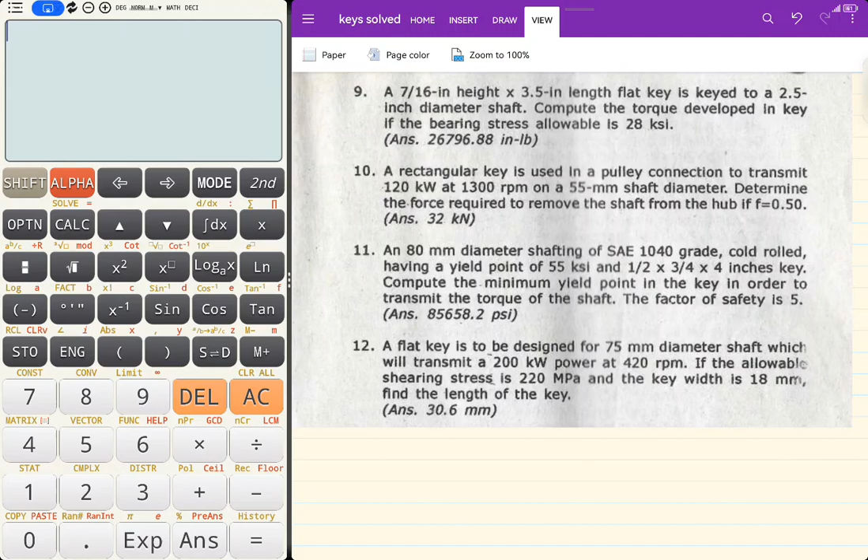So, let's have the last part of your keys bago tayo magpunta ng coupling. Okay? So, let us read the following problems. I have here problems 9 to 12. Okay? So, let's start with number 9.

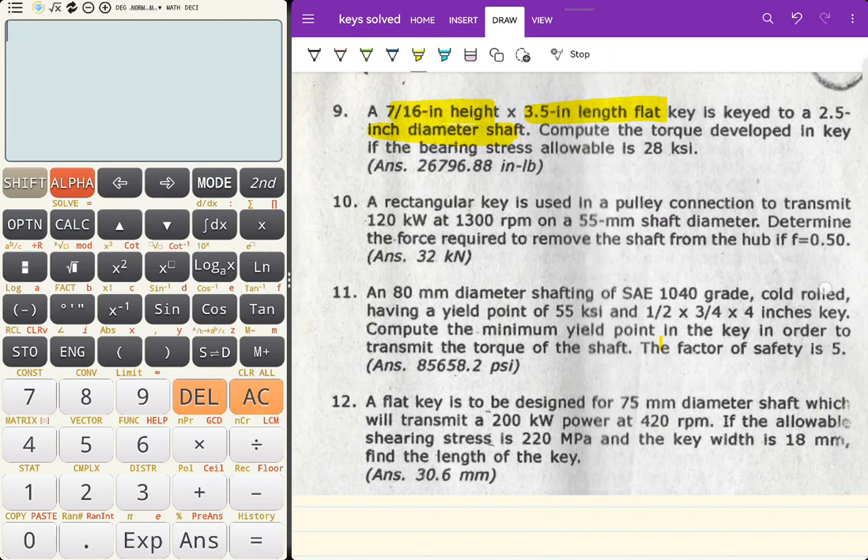A 7/16" height, so binigyan ka agad dyan ng height, by 3.5" length, flat key, is keyed to a 2.5" diameter shaft. Okay? Compute the torque developed in the key if the bearing stress allowable is 28 KSI. Alam naman natin from the past discussions that kapag hindi mo kayang kabisaduhin yung formula, you need to draw. But in order for us not to take longer, ito na yung formula niya.

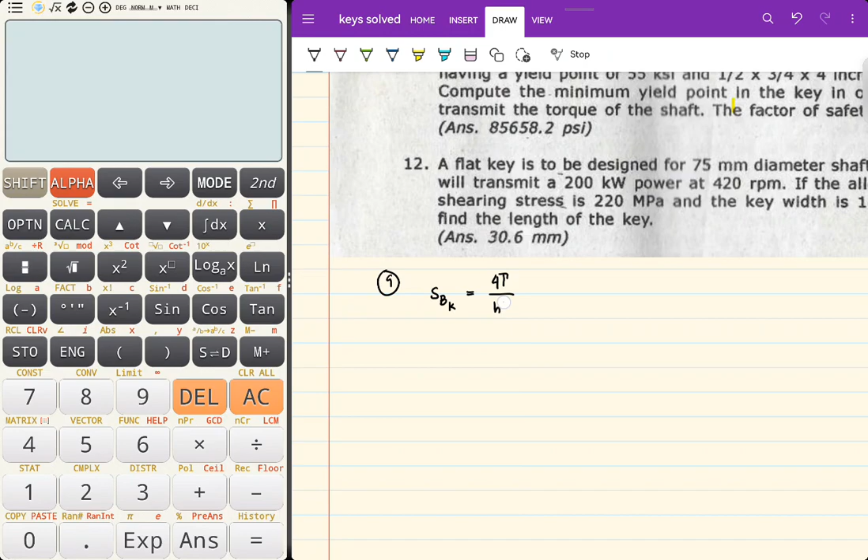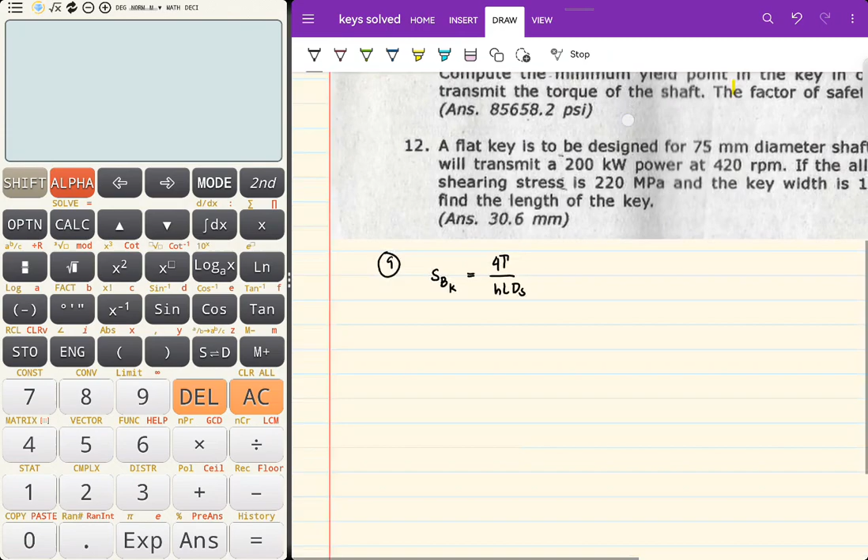Okay, the bearing stress on the key is equal to 4T/HLDs. Given kagad yung H, given kagad yung L, given kagad itong stress, and then the diameter of the shaft. All you need to do is to reform this equation. So this will become torque equal to SBK·H·L·Ds divided by 4. Very basic yung mga solving natin dito.

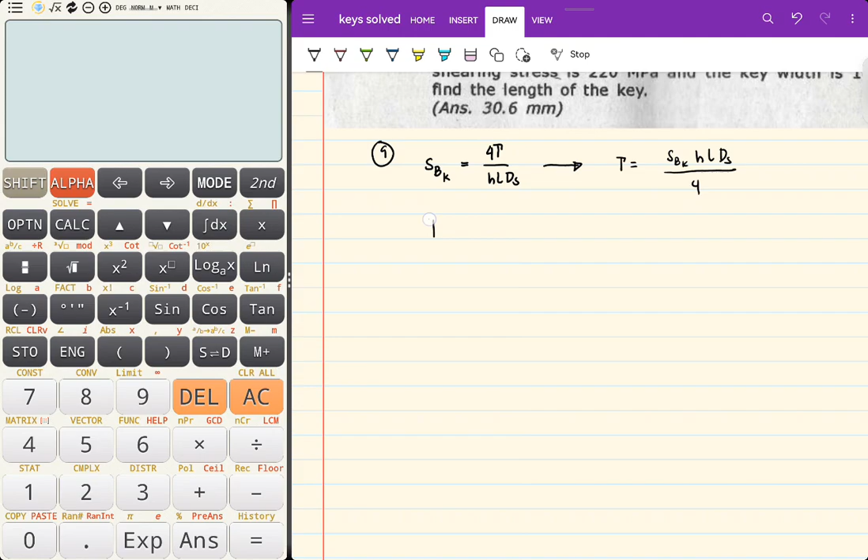It won't take long. So, your SBK is 28 KSI. So, that is equal to 28,000 pound per inch squared. Okay? Iba yung KSI sa kips, ha? 1 kip equal yan sa 1,000 pounds. Kasi ang kip, kilo-pounds. Remember that. And then H is 7/16". Yung L is 3.5". The diameter of the shaft is 2.5".

Divide by 4. Ang lalabas dapat dyan, since it is torque, pound-inch. Cancel the same units. So, 28,000 multiply to 7 divided by 16 by 3.5 times 2.5 divided by 4. So the answer is 26,796.875 pound-inch. Basic yung mga ganitong problems. Check.

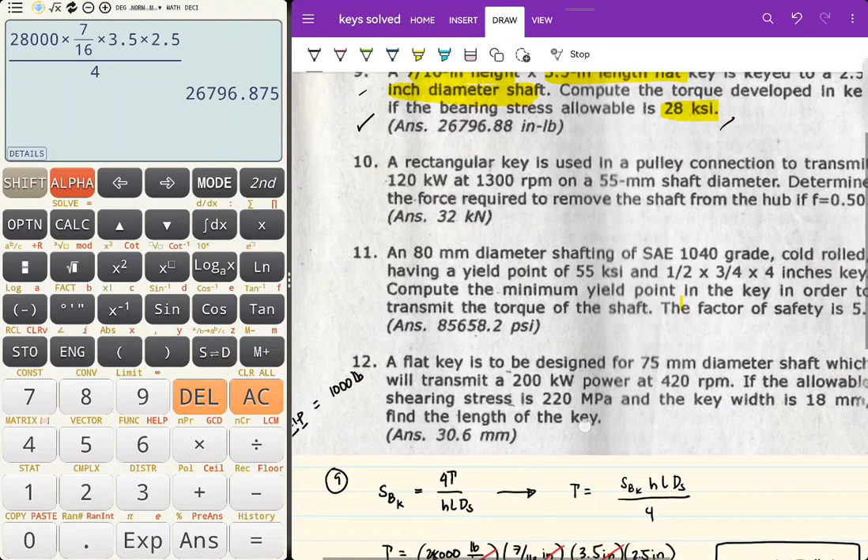Number 10. So, a rectangular key is used. Ito yung keyword. Rectangular key is used in a pulley connection to transmit 120 kilowatts of power at 1,300 RPM on a 55 mm shaft diameter. Determine the force required to remove the shaft from the hub if f is equal to 0.50. Meron kang friction. Yan yung kumukontra dun sa force to remove the shaft from the hub. Tingnan natin. So, may mga binigay sa akin dito.

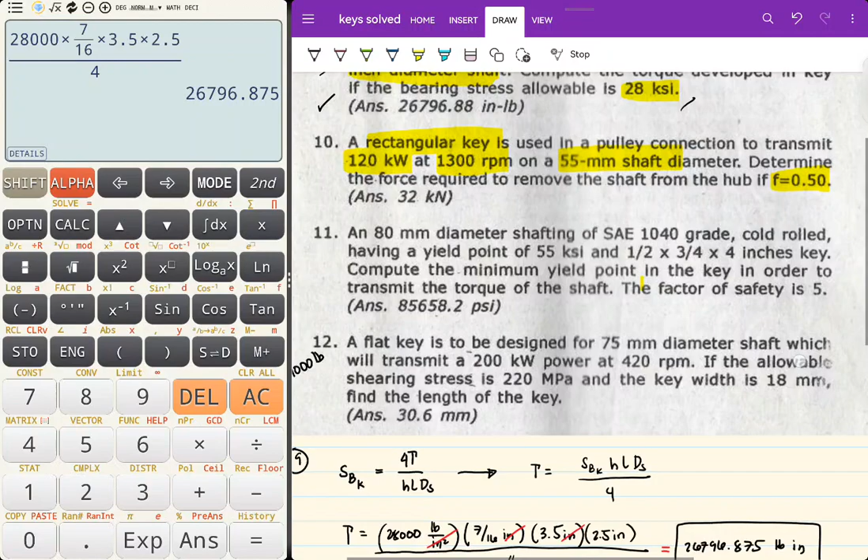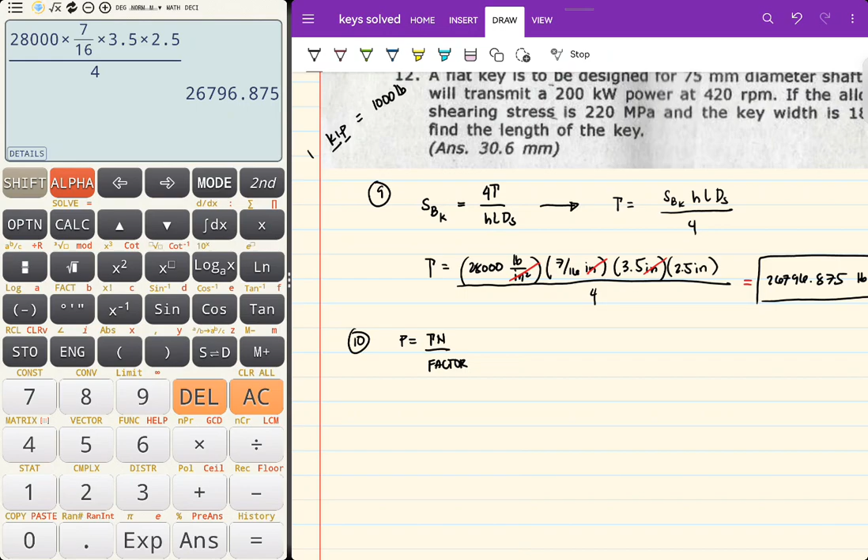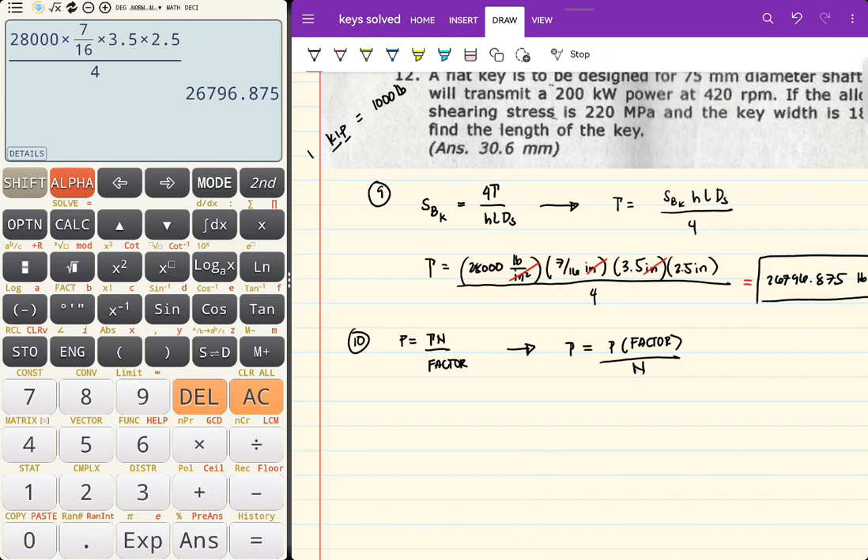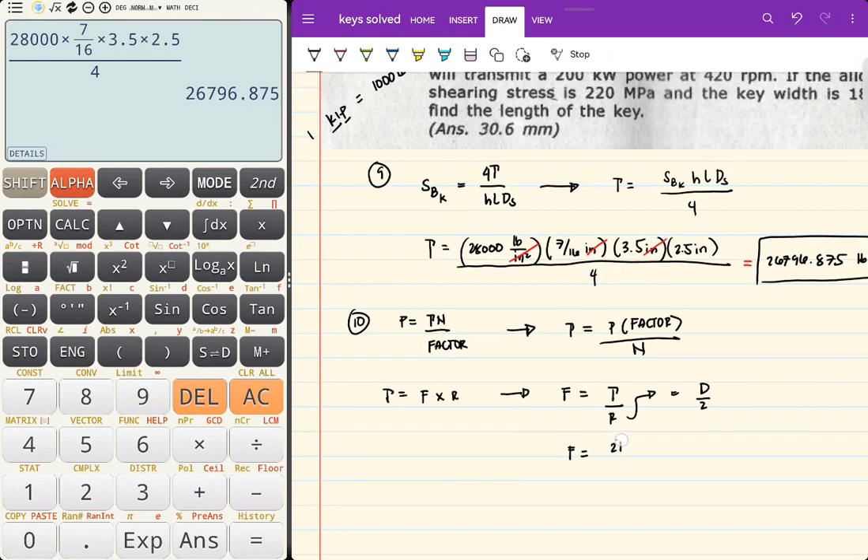So, number 10. Ang hahanapin natin is the torque muna. So, power is equal to T·N divided by factor. So, in terms of the torque, that is power times factor divided by N. So, torque is equal to force times radius. Ang kailangan ko is force. Reform natin. Force is equal to T divided by R. Yung R kasi is simply equal to D divided by 2. So, F is equal to 2T divided by diameter of the shaft.

So, palitan natin yung torque. Force is equal to 2 times the torque, that is power times factor, divided by N times diameter of the shaft. So, force is equal to twice of the power, 120 kilowatts, times the factor, 9549123 Newton-millimeter RPM every kilowatt, divided by N, 1,300 RPM, times 55 mm diameter of the shaft.

Cancel same units. Millimeter, kilowatt, RPM. Ang matitira is Newton. Kailangan natin kilonewton. So, multiply natin ng 1 kilonewton every 1,000 newtons. Ang natira ngayon kilonewton. So, the force is equal to 2 times 120 times 9549123 divided by 55 times 1,300 times 1,000. Basic oh. So, the force is equal to 32.0525.

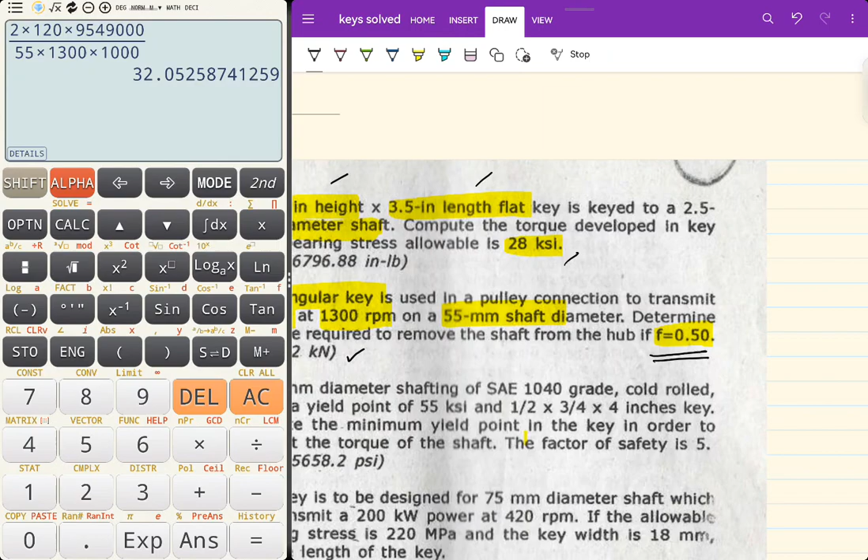So, ano ang malalaman natin dyan? That you don't have to doubt kapag may nakita kang unfamiliar. Yung unfamiliar point dito is itong friction coefficient. Since hindi naman siya gagamitin dun sa ating formula, why not try it first? Calculate mo muna. Pag nakita mo dun sa choices na malapit yung answer mo, then that is the answer. Huwag mo problemahin masyado. Ilagay mo muna sa equation, isolve mo. Like this friction, which is very unrelated sa problem. So, let's proceed with number 11.

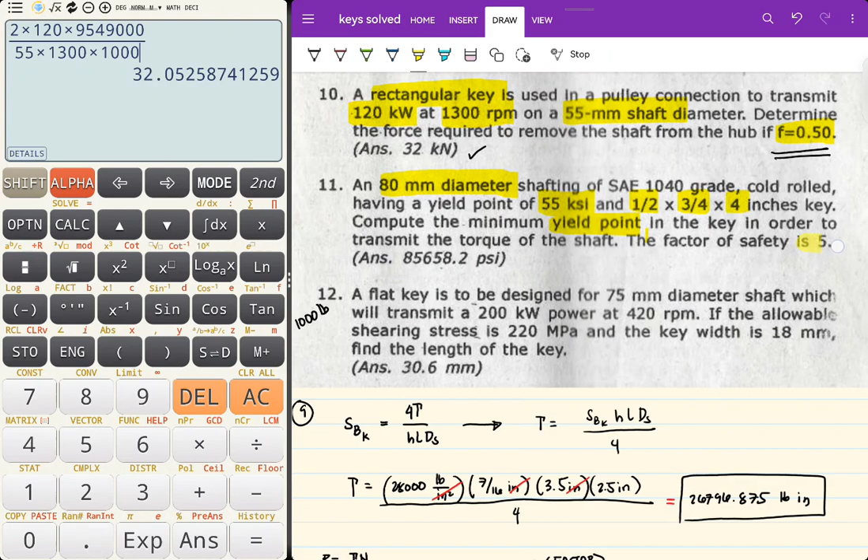An 80 mm diameter shafting of SAE grade 1040, cold rolled, having yield point. Binigyan ka ng yield point. Tapos, size of the key: height, width, and length. Magkabaliktad yan eh. Height, width, and length, ganun dapat yung pagkaka-arrange. Now, compute the minimum yield point in the key in order to transmit the torque in the shaft. Meron din tayong na-solve na ganito. The factor of safety is 5.

So, nagbigay ng yield point sa shaft. Since yung shaft mo is with keyway, dun tayo sa standard ng shafting. Ibig sabihin yung factor of safety of the shaft is the same factor of safety nung key. The only thing na magiging related sila is the torque. Yung torque on the key is equal to the torque on the shaft. Tandaan natin yan. So, the design stress on the shaft is equal to 16T over pi diameter of the shaft cubed. This is equal to 0.6 SY divided by the factor of safety.

I-solve ko siya in terms of the torque. So, the torque of the shaft will become 0.6 SY of the shafting times pi diameter of the shafting cubed divided by 16 factor of safety. I now have the first equation. The other one, nagbigay dito yung yield point of the key. Babase natin siya dun sa shearing stress on the key. That is equal to 0.6 SYK divided by factor of safety. Yung SSK, shearing stress on the key, is equal to 2T, diba?

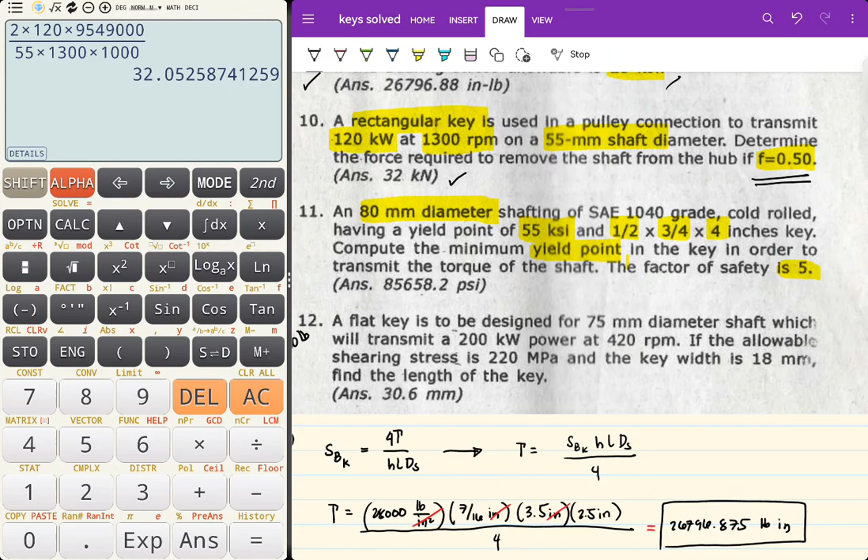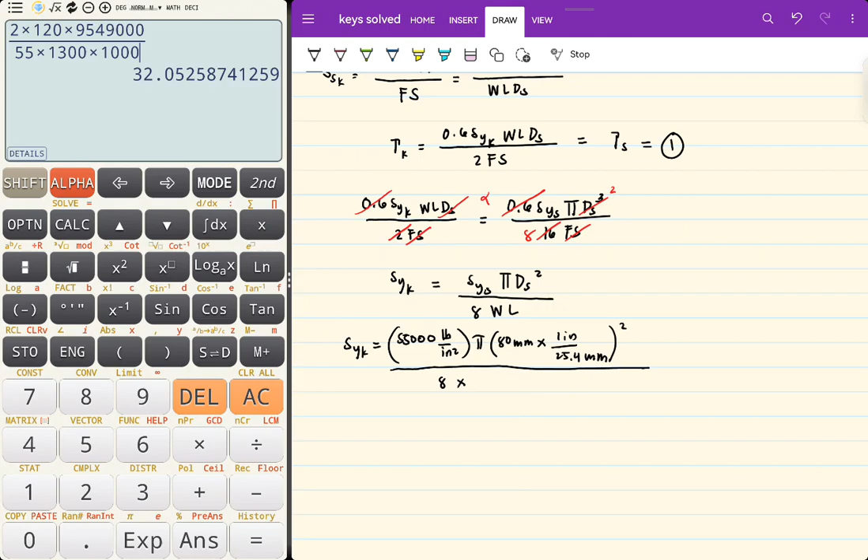So, SYK is equal to, yung SYS natin is, bigay ba dito? 55 KSI. So, 55,000 pound per inch squared. Pi, diameter of the shaft. Diameter of the shaft is 80 mm. So, 80 mm times 1 inch every 25.4 mm. Naka-squared. Divide by 8 times W, W is 0.75. Ito, 3/4 and 4 inch. 0.75 inch times 4 inch. Cancel all same units. Dapat lalabas dyan is PSI, pounds per inch squared. So, inch squared, inch squared.

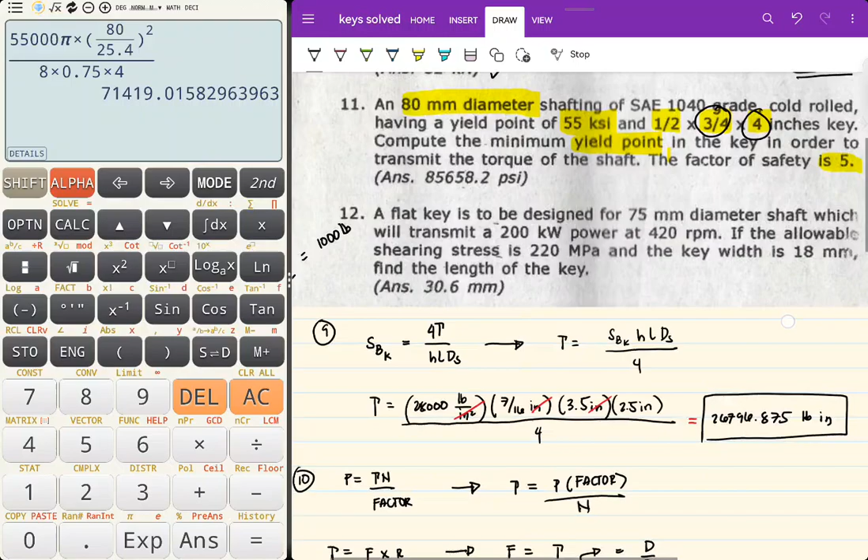So, the answer is 55,000 pi times 80 divided by 25.4, square mo yung value, divide by 8 times 0.75 times 4. So, 7.1. O, bakit kaya kulang? I think, dito, W mo is 1/2. The width is 1/2. Try natin palitan ng 0.5. So, hindi pa rin sakto. Ano kaya naging problema? Factor of safety is 5. O, tama naman.

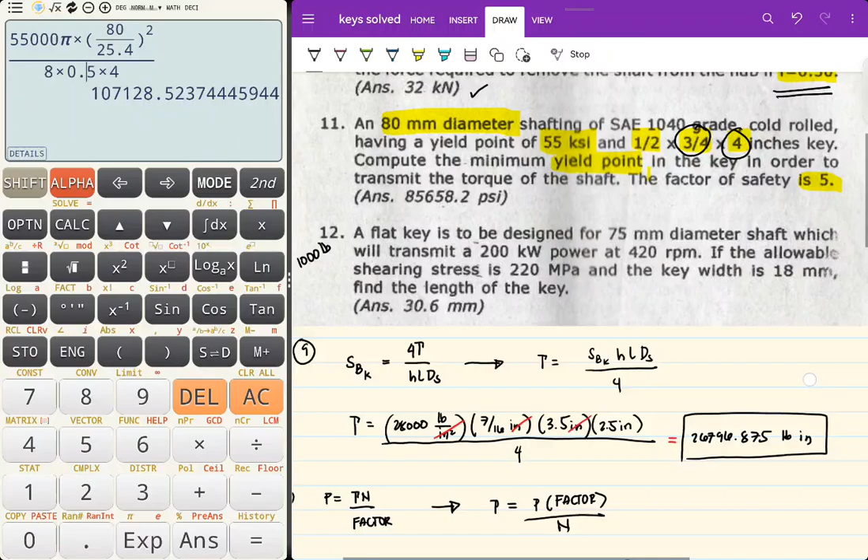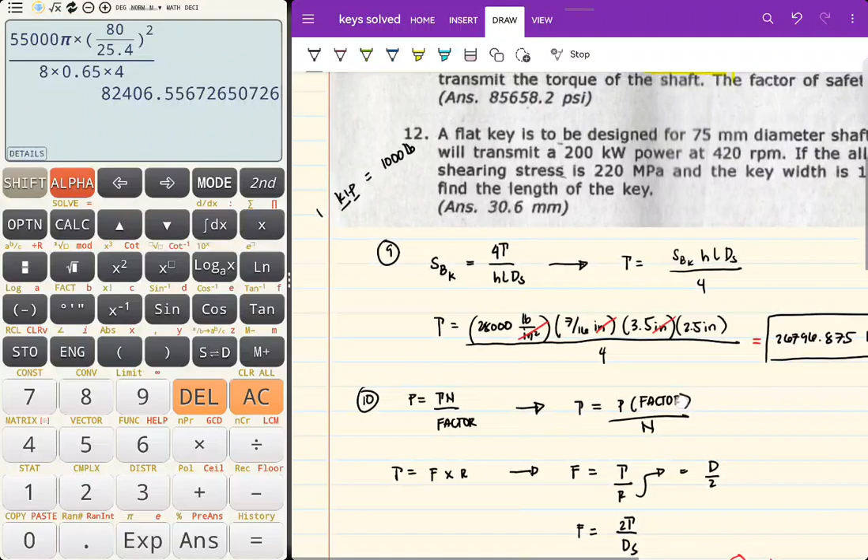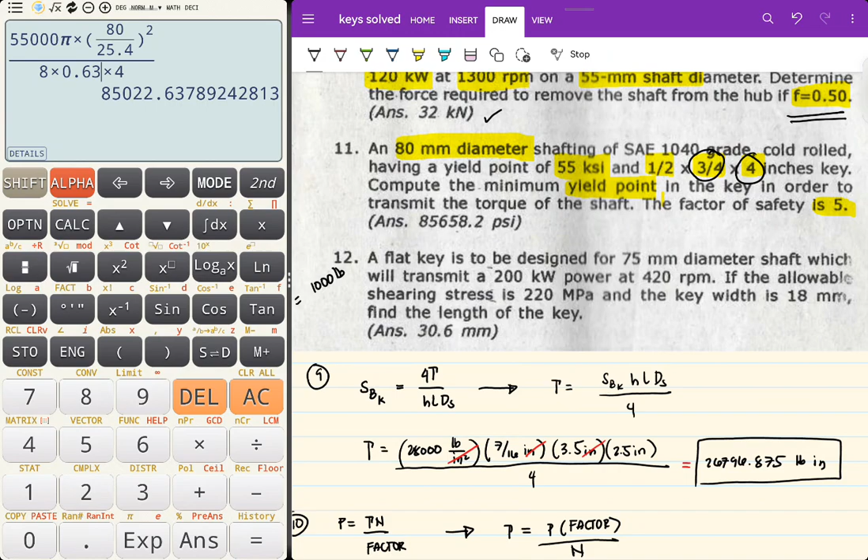The minimum yield point in the key. Meron ba ako nakaligtaan? So, 8 times 0.75. Ayan, 0.63 yata ginamit nyo. I don't know saan nagmula. Somewhere there, yun yung ginamit. I don't know what happened there. So, ang sagot natin dito, 0.75. Kasi tignan nyo na to ha. Kinancel ko dito yung 2. Magiging 8 nga naman yung 16 Fs.

So, in terms of the torque. So, review natin. Tama naman yung process dito. Dito naman, so may 2, tapos may 0.6 Fs. Same lang sila. May sinabi bang same ang material ng key sa shaft? Wala. Sa shaft, itong factor of safety na 5. So, kung ganun ang solving, let us try. Ano ba yung sagot niya? 71,419.0158 PSI. Let us try.

What if ito lang yung sa key, hindi natin gagamitan ito? Yield point on the key. What if wag natin gamitan ito? Yung 0.6, dito, wag natin gamitan ito. This part, don't use it. Equate lang natin. So, SSK is equal to yung torque, 0.6 SY of the shaft pi diameter of the shaft cubed divide by 16 factor of safety.

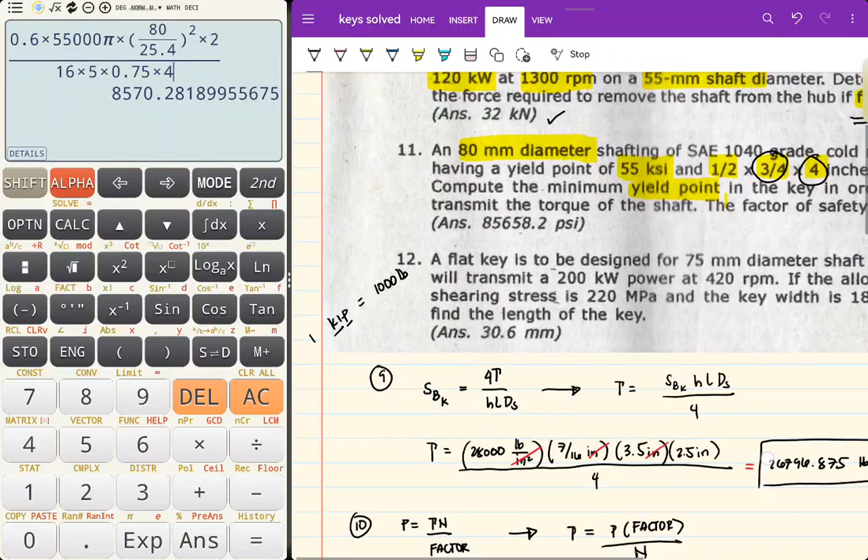So, lumiit yung value. Kulang ba ako? I think not. Talagang maliit. 8570. Kulang ng isa. Saan kaya niya nakuha yan? Don't know. Anyway, kung talagang ganun yung solving, wala tayong magagawa. Trinay naman natin. We have exhausted our powers, di ba? So, let's move on to number 12.

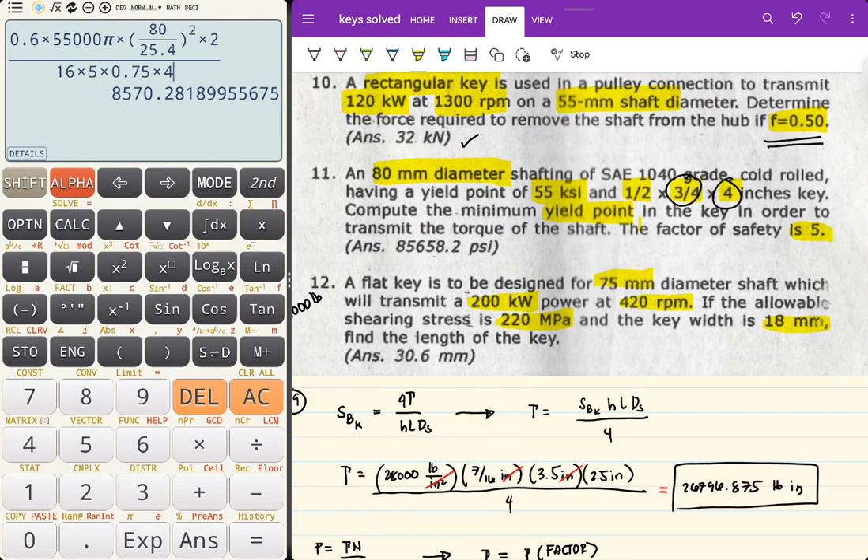So, a flat key is to be designed for 75 mm diameter shaft, which will transmit 200 kilowatts of power at 420 RPM. If the allowable shearing stress is 220 MPa and the key width is 18 mm, find the length of the key. So, direct substitution to. Power is equal to Tn divided by factor. Alam naman natin, pag nagbigay ng power at saka ng N, or the rotational speed, torque kagad yung hahanapin natin. So, torque is equal to power times factor divide by N.

So, the shearing stress on the key is given. SS key is 2T over WL ds. Wala akong L, may ds ako, may W ako, may torque na ako. So, L ang hahanapin ko. L is equal to 2T over SS key W ds. Expand natin siya. So, this is twice of the torque, power times factor, divide by SSK times N W ds. So, L is equal to twice of the power. Power given there is 200 kilowatts, times 9549000 Newton millimeter RPM every kilowatt.

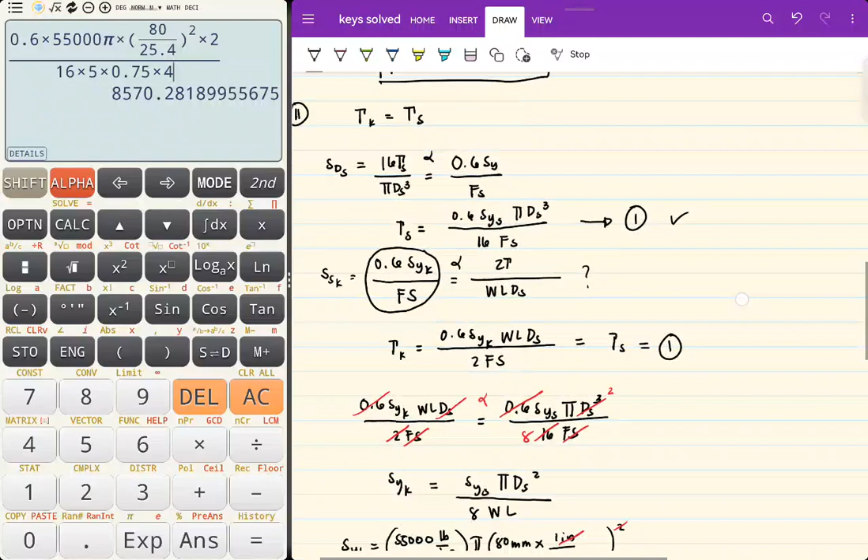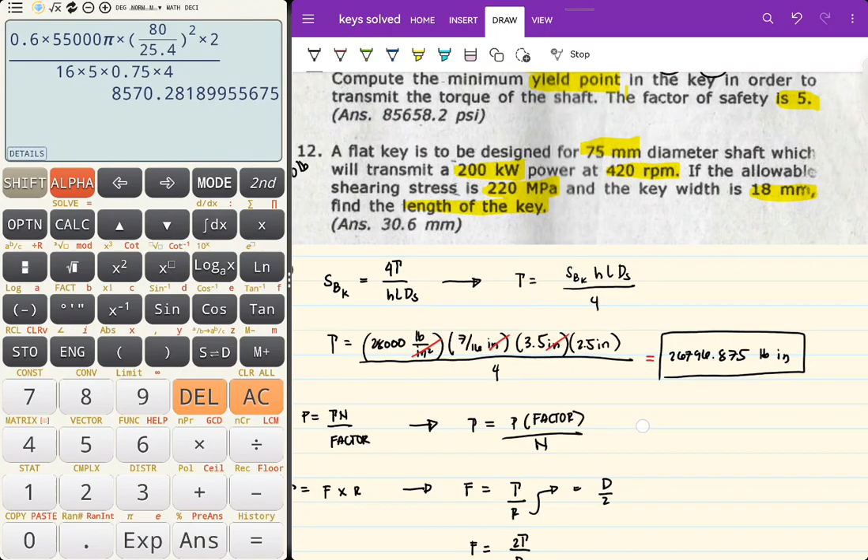Divided by shearing stress on the key, 220 MPa. Tapos N is 420. May MPa dyan, palitan mo ng Newton per millimeter squared. Tapos 18 mm is the key width, and then 75 mm diameter. Cancel all same units, mm squared. Ano ba? RPM to. Ito pala dapat ang RPM. Yung MPa mo ay Newton every mm squared. Cancel same units. RPM, RPM. Newton, Newton, kilowatt, kilowatt. Natira na lang si mm. Kailangan ko is mm.

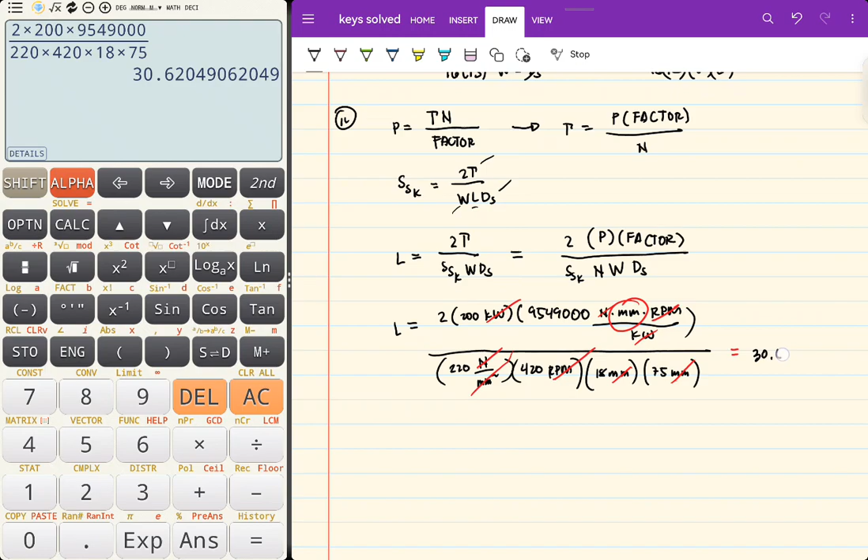Pasok yung value sa calculator. 2 times 200 times 9549, divide by 220 times 420 times 18 times 75. So, the answer is 30.62 mm. Eh, kayang-kaya niyo yan.